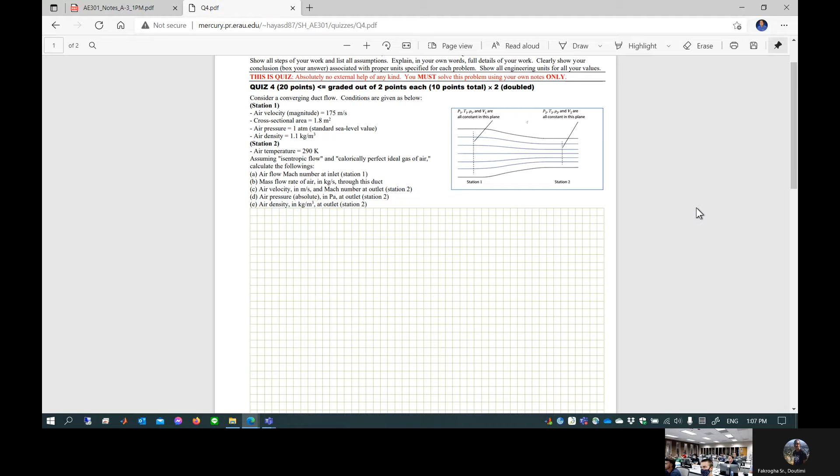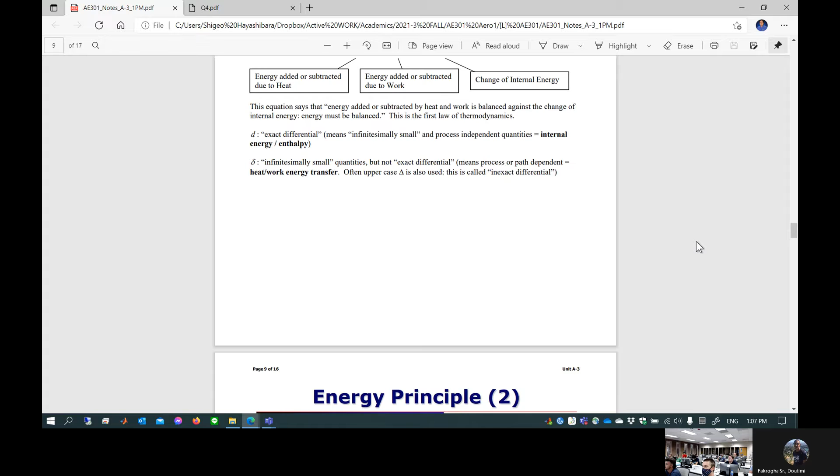So let's just move on. We are spending several class periods going over this unit A3, and then we finally gave up. Bernoulli's equation is not good, especially for high speed, because we are completely ignoring something which needs to come into play when we try to take a look at high speed. Because in high speed flow, obviously this thing happens all the time, okay, so this is an important thing.

Notice, if you look at the unit mass of air, that unit mass of air creates the volume, that's called specific volume of air. Specific volume of air is no longer constant in high speed. Compressibility comes in, that's what you call compressibility of high speed aerodynamics. Expansion, compression always happens; that is essentially energy transfer due to work. So you're going to introduce energy transfer due to work because the work is produced due to the high-speed flow field. That is going to change the energy level as it moves.

So how can we include that kind of thing? That's the main subject. Then we introduced the first law of thermodynamics. So we are going to go back once again. Sorry, I always have to change it up. Okay, so we are going to once again take a look at this equation.

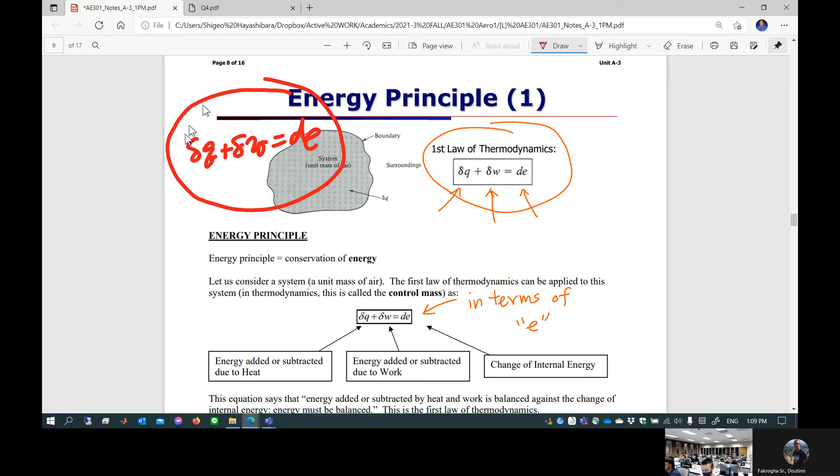Delta Q plus delta W equals dE, the first law of thermodynamics. This is always the starting point. First law simply says whatever the heat transfer is and whatever the work transfer is, combining those two gives the internal change of energy, internal energy per unit mass. This is the first law of thermodynamics, control mass form. We always go back there.

Important thing is happening: we discovered that in high speed flow, compression and expansion is essentially work energy transfer. It's happening because it's high speed. It just keeps going, so we are no longer ignoring that. Let's move on to that.

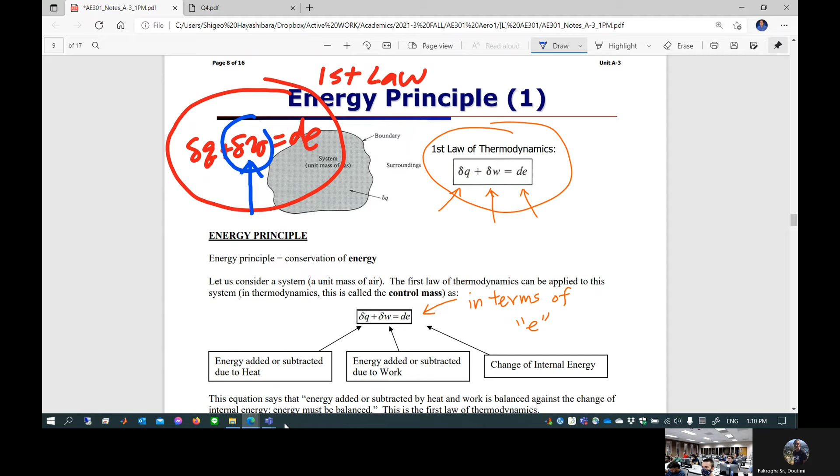We incorporated this moving boundary work into the first law of thermodynamics, and then we introduced two equations. This is still first law of thermodynamics, we just incorporated the work into the equation. Those two equations actually lead you to the definition of two different specific heats.

Specific heat under the constant pressure process, specific heat under constant volume process. Pressure and volume are always involved, so in order to determine specific heat, you have to assume one of them being constant. Otherwise, how can you figure out this component? We spent time incorporating specific heat under two different conditions: one condition volume constant, one condition pressure constant. If the volume is constant, you can relate amount of heat transfer with amount of internal energy. If it's under constant pressure process, you can relate amount of heat transfer with change of enthalpy. That's the specific heat we talked about, two different kinds.

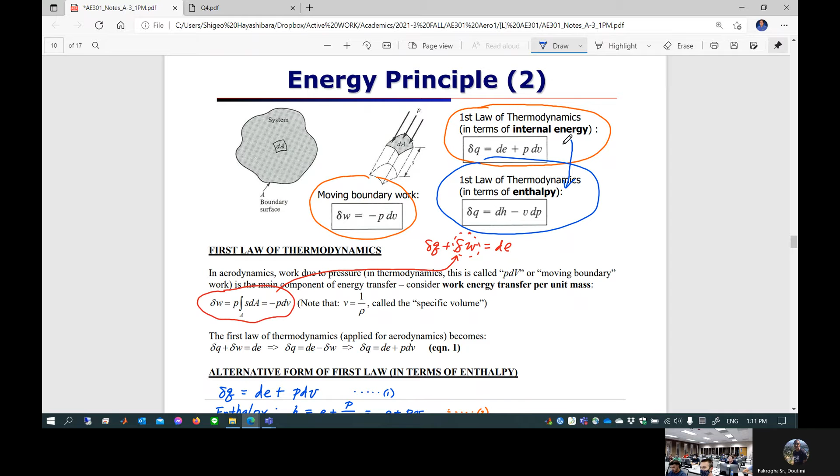As you remember from thermodynamics, we can model the specific heat either as completely constant, or still a variable but only depending on temperature. One is called calorically perfect ideal gas, one is called thermally perfect ideal gas. You can still model those as perfect gas, ideal gas, so you can relate pressure, temperature, density within the flow field because it's ideal gas. But one is much easier, one is more involved. Which one do you want to do, calorically perfect or thermally perfect?

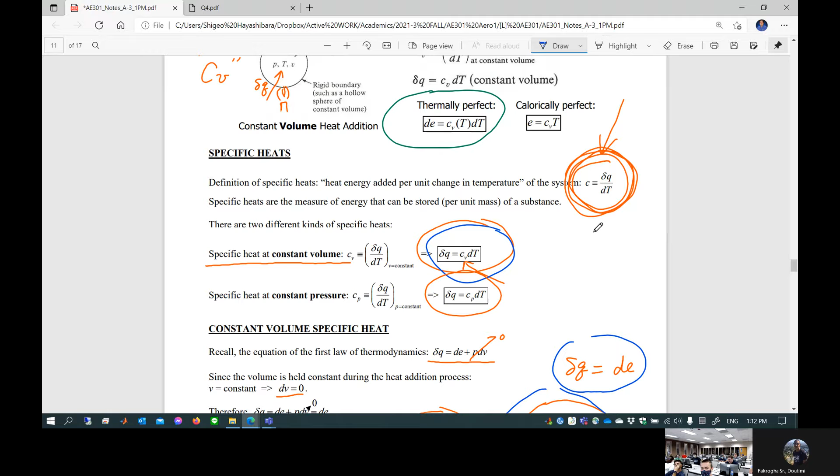Obviously, calorically perfect. I'm praying that the professor is not going to pick a thermally perfect problem for the next exam, because that would indicate the professor wants to flunk everybody. Oh, professor hates those students, he wants to flunk everybody. So let's just pick up the calorically perfect model -- it's so easy, I'm not going to do that, don't worry about it. You don't hate us? I don't hate you. I'm neutral, at least at this point. If you don't sleep in my lecture, I'm neutral, but it could tip toward negativity, I don't know, I'm not sure. Just joking, don't take it seriously everybody, I'm just trying to make you awake.

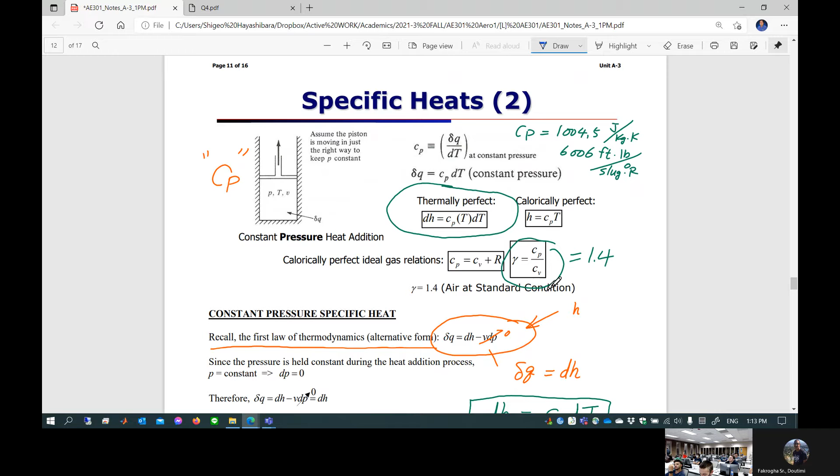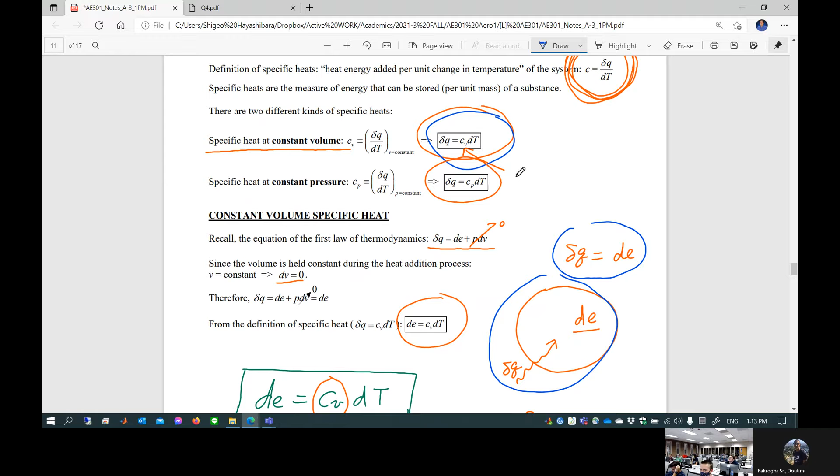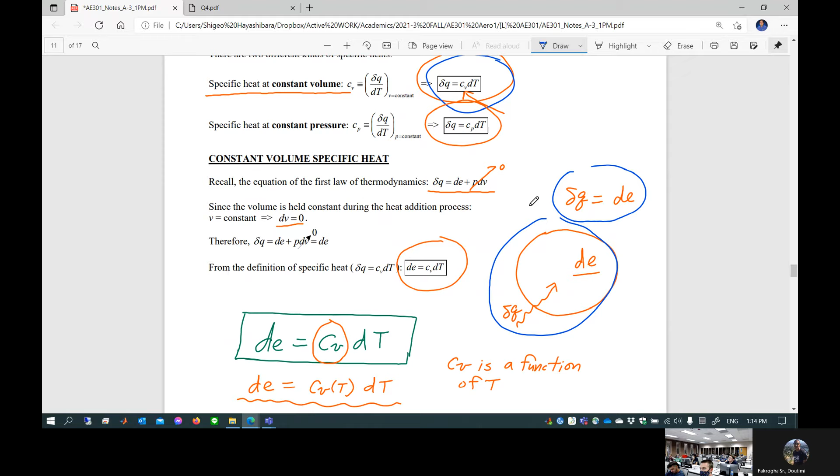So we came up with a few equations. If we assume calorically perfect ideal gas, having constant value of specific heat, either Cv or Cp, you can relate the temperature to internal energy or temperature to enthalpy itself. Using this knowledge, if you see a high-speed flow field where pressure and temperature are given, you can relate those things, knowing that specific heat value doesn't change. In other words, if you know the temperature, you know how much internal energy you have, and you also know how much enthalpy you have. That's the calorically perfect ideal gas model. So you now have knowledge relating temperature to energy, and enthalpy. Okay, so far we did that.

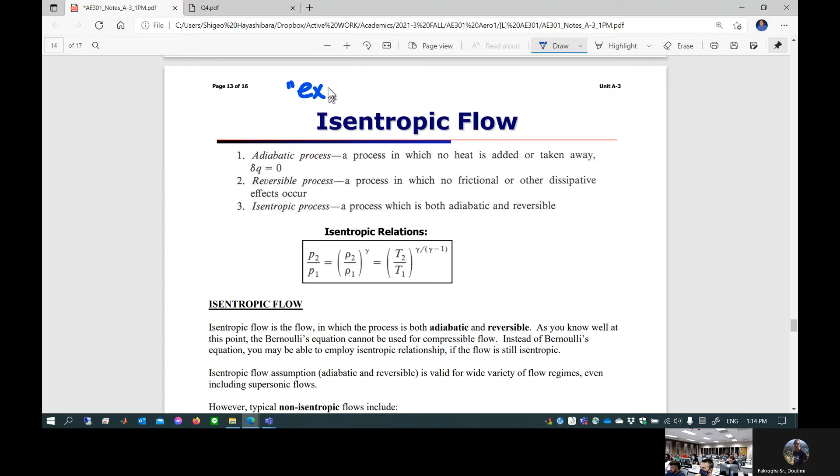Today, let's apply this in a practical sense to the high-speed flow field of aerodynamics. In this class, we are going to limit our applications to only external aerodynamics -- external aero, external flows. What is that? External means, well, this is an airplane, and you have a flow field going externally over that body. That's it.

Is it doing work? Because it's high speed, yes, if it's high speed. If it's low speed, no.

External flow is essentially flow over some kind of body, including airplane, automotive, and some other things. But we are not going to talk about something complicated, such as the flow field inside a jet engine -- that is not external flow. There are a lot more things going on: you have an inlet diffuser, you go through the compressor, the combustion chamber, the turbine, the exhaust nozzle, afterburner. That's not external.

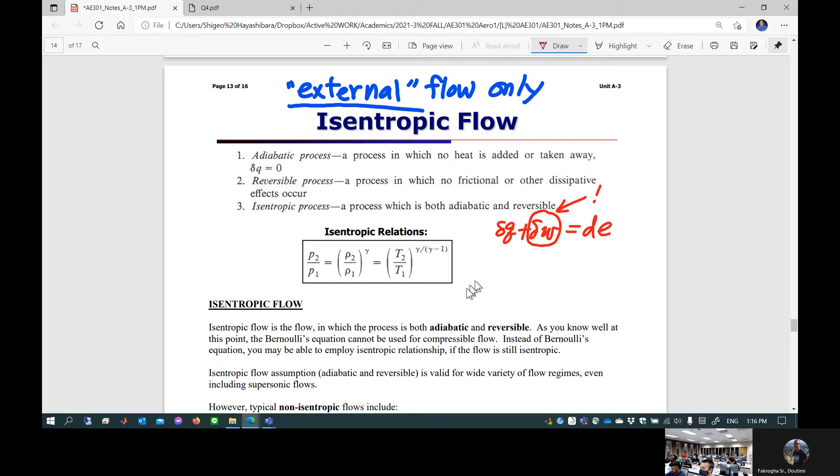Okay, so that's external flow. We want to make everything simple. If we look at application only for external flow, we can assume this way. Let's go back to the first law of thermodynamics, the equation we started with. First law of thermodynamics says delta Q plus delta W is equal to dE, right? Now, in high-speed aerodynamics, this is always happening, we cannot ignore it. However, if we're talking about external flow only, oftentimes we can ignore this term. You know what I'm talking about?

This is not a combustion chamber. You are not adding any heat energy. Flow is incoming, flowing over it, flows away. That's external flow, so we can assume this is adiabatic. You are not purposely adding or taking energy through heat. That's called external flow, okay?

So if this delta Q is 0, what do you call this process in thermodynamics? No heat transfer, adiabatic. So we're going to limit to adiabatic process only because it's external aerodynamics. Do not assume this equation can be applied casually for any high-speed flow field. If you're talking about a rocket nozzle, this is not adiabatic. If you're talking about a jet engine, this is not adiabatic. And even in an external flow field, if you create a shock wave and the flow goes across it, it's probably adiabatic, but it's not reversible.

Reversible. What is reversible? Anybody please tell me, go ahead. You can do the same process forward and backwards. That's right, in other words, you can completely reverse the process. You can retain the same amount of energy.

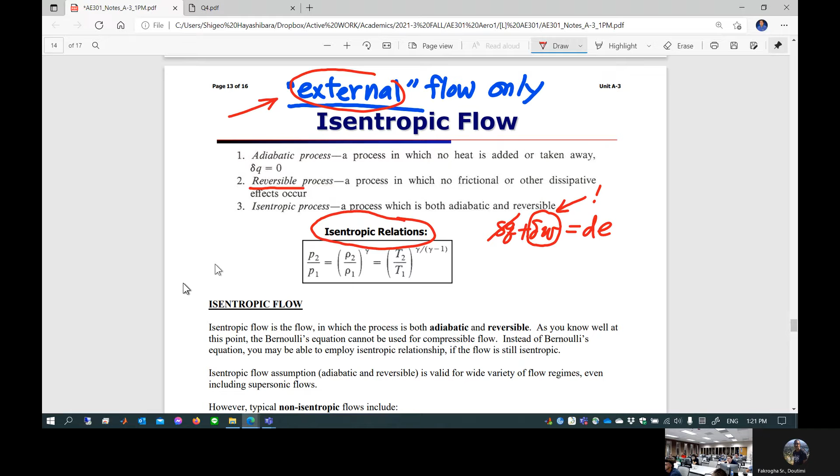Isentropic means adiabatic and reversible process. So even though this flow field is supersonic, it's still close to isentropic. It is compressible, yes, it's high speed. Density changes, but do you actually lose energy? Not quite, unless you go across a shockwave or something like that. So be careful about that.

If the flow field is isentropic, you can do two things. Number one, you can apply isentropic relations, which relate pressure, temperature, and density. Again, isentropic flow is still ideal gas, so you can relate pressure, temperature, density. But it's not the relationship P equals rho R T. Too bad, okay? You can still use this relationship.

Well, P equals rho R T anyways, but for two different locations, if you know density here, you can get the density there using isentropic relations, because you can assume this is isentropic flow. These two places still have to be on the same streamline. That's right, correct. We still stick with Euler's. So that's the next page.

The second thing you can do is apply the first law of thermodynamics, simplified version. What is the simplified version? This is it: delta W equals dE. Whatever work-energy transfer occurs because of compression or expansion is going to be 100% converted into internal energy change, so the temperature change, if you measure such a thing, you can determine the compressibility. If you have a compressibility, you have a change of temperature between two locations, even though you are not heating up or anything. Does it make sense?

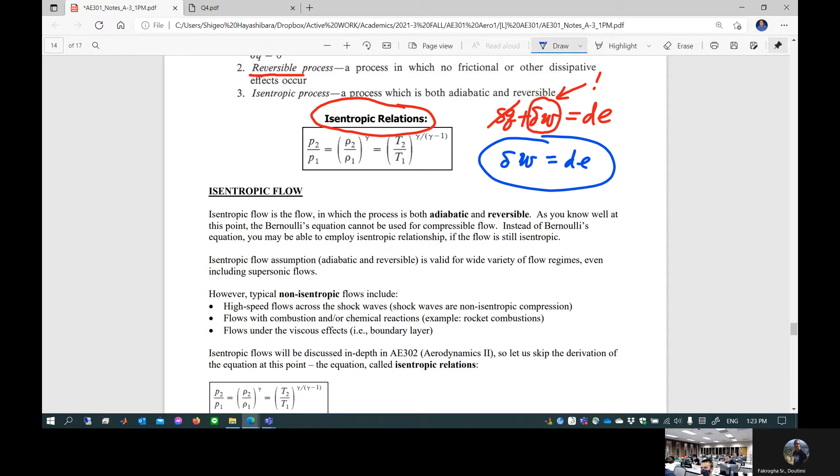Okay, so let's move on. Now we are going to derive the energy equation here. All right, so energy equation. Let me just catch up my cheat sheet. Energy equation, okay, here we go. So energy equation here.

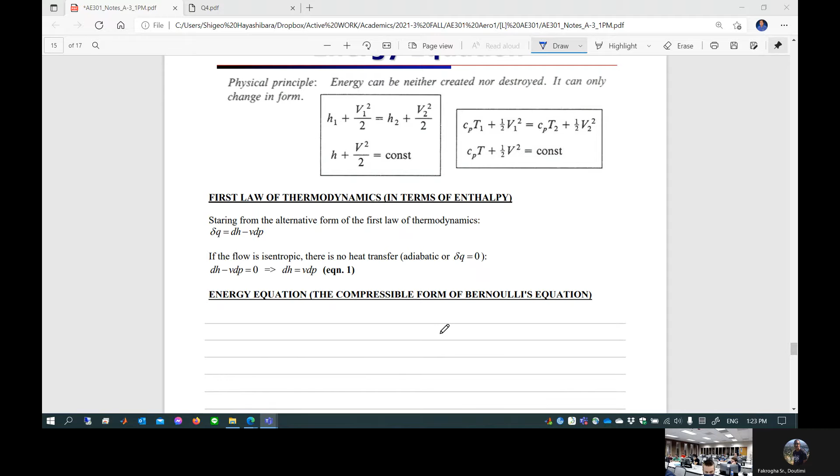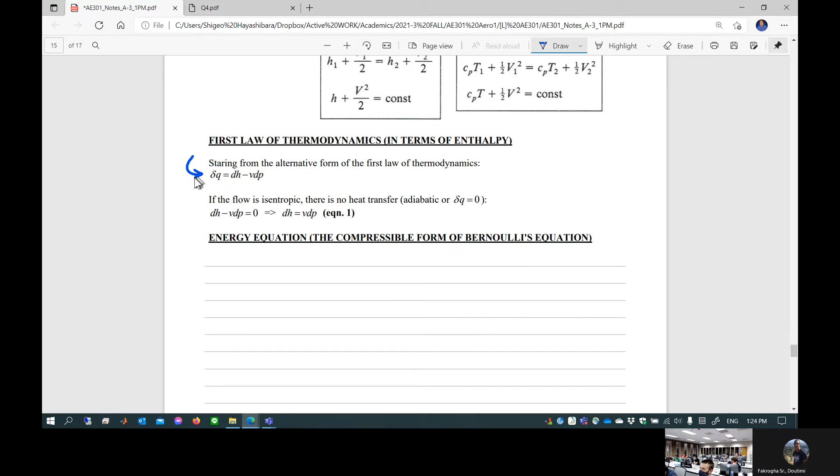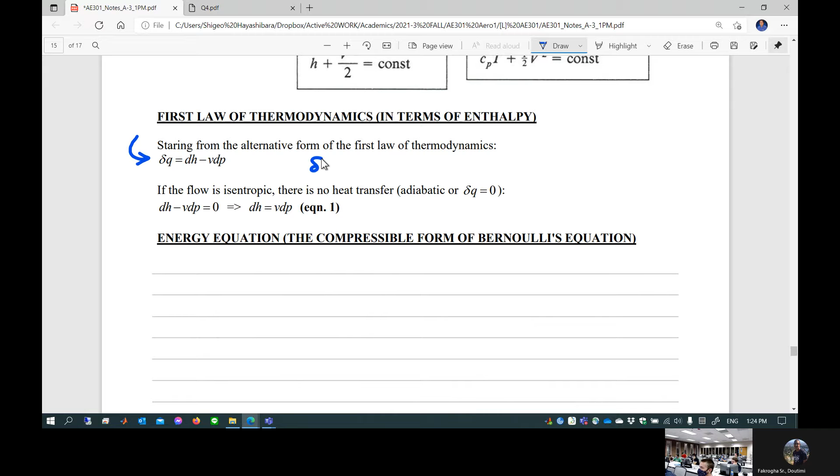Starting point is the first law of thermodynamics. Let's just take a look at it. I'm going to pick up the first law of thermodynamics in terms of enthalpy. Do you remember this equation? This equation relates the heat energy transfer to the change of enthalpy and V dP. Now, if this is adiabatic, delta Q is 0, because one of the conditions for isentropic flow is adiabatic. This equation now becomes this.

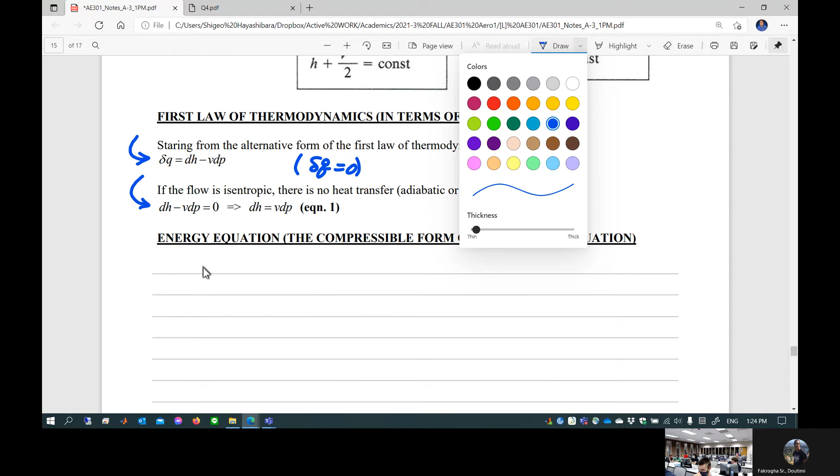So now I pick up equation 1: dH equals V dP. This is equation 1, nothing but the first law of thermodynamics. We can use the first law because this is isentropic flow. The first law still holds. We purposefully ignore the second law of thermodynamics, assuming this is a reversible process. Energy level doesn't change between two locations; energy stays constant. Anyways, we want to combine this with something else.

Guess what we want to combine this with? Remember, when we got Bernoulli's equation, where did we begin? Conservation of linear momentum, Euler's equation, here we go. Bernoulli's equation comes from Euler's equation with the condition density constant. Let's just go back to Euler's once again. What is Euler's equation?

As we know, Euler's equation is dP equals minus rho V dV. Do you remember this Euler's equation? This is along a given streamline. Do you remember that? This is Euler's equation. If you pick up this Euler's equation and assume density is constant along the given streamline, you get Bernoulli. But now we know we cannot assume such a thing. This is high speed, okay? So density might be a different value.

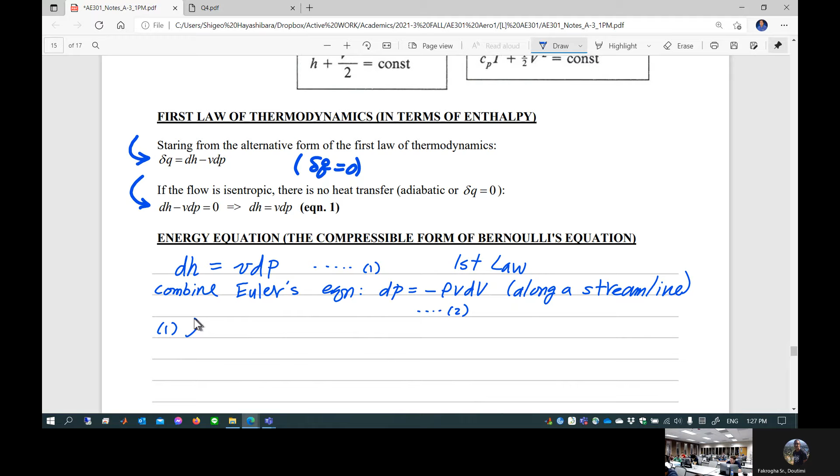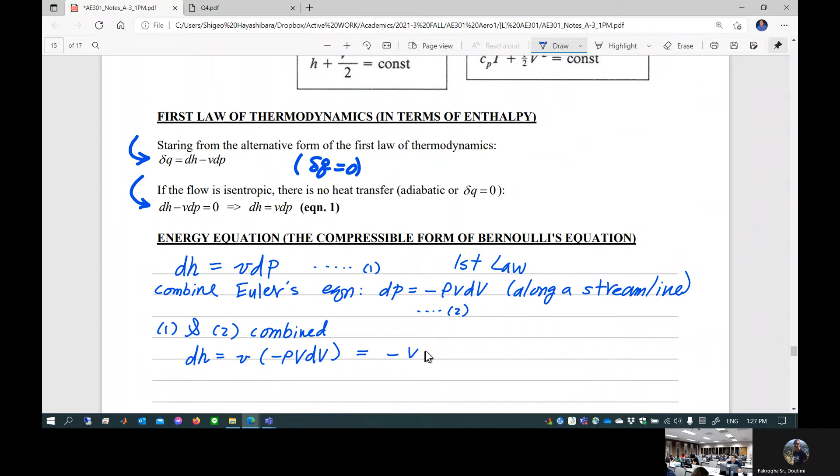So this is equation 2. Let's combine equations 1 and 2. So it's going to be 1 and 2 combined, let's just see it, okay? You're going to plug dP back into here. So dH equals lowercase v times dP, which is minus rho v dV. Those are velocities, this is specific volume, inverse of density. What do you have here? Minus v dV, right? Oh, okay. Can we integrate this? Oh yes, let's integrate.

So you are going to pick up the streamline. This is location 1, location 2. Along this given streamline, you can integrate this equation: integral between location 1, h1, h2, dh is equal to negative integral V1 to V2, V dV.

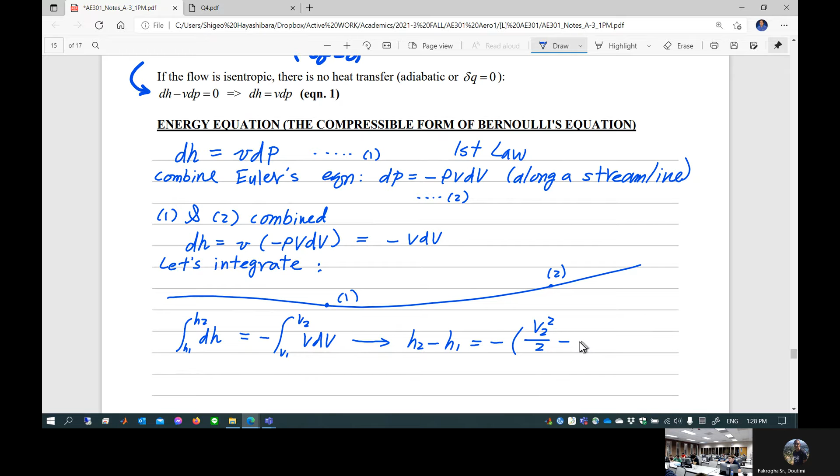This actually gives you the change of enthalpy between location 1 and 2. h2 minus h1 is equal to negative V2 squared over 2 minus V1 squared over 2. This gives you the relationship between 1 and 2: H1 plus V1 squared over 2 is equal to H2 plus V2 squared over 2. Simplified, H plus 1/2 V squared is equal to constant.

Oh, I got the algebraic equation. Kind of looks like Bernoulli. This is called the energy equation, in algebraic form. So suppose if I have a value of h and a value of velocity, you can plug in and get the value out. And then if this is an ideal gas, calorically perfect,

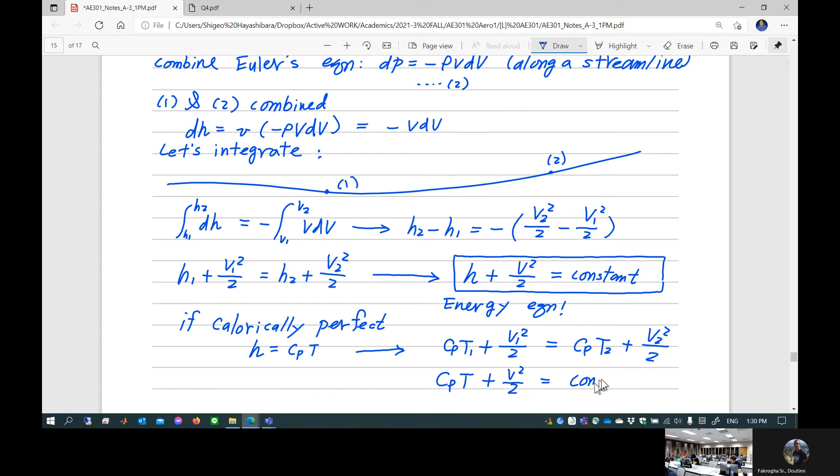you can say H is equal to CpT. So you can say CpT1 plus V1 squared over 2 is equal to CpT2 plus V2 squared over 2. That simplifies to CpT plus V squared over 2 is constant. Of course, this constant is along a given streamline.

Go ahead, Michael. Don't you mean thermally perfect? No, caloric— well, thermally perfect is dH equal to Cp as a function of temperature still. That's what I'm confused about. Thank you, yeah, this is thermally perfect, you don't want to deal with it. This is calorically perfect, it's algebraic.

So the energy equation, that's the specific energy, isn't it? Specific, because it's energy per unit mass. That's right, yeah, correct, you're right. Energy equation.

Oh, this is the equation I wanted to have. Now I can apply this equation for more than 0.3 Mach number because density can be a variable. However, what's the condition? Still, this is a steady flow, implicitly no body force because it's coming from Euler, and then it's coming from the first law of thermodynamics, so this must be isentropic. And also this is perfect gas, calorically perfect ideal gas. If so, you can use this equation instead of Bernoulli's for high speeds.

Okay, so next page, let's just apply it. Take a look at it. Go ahead, he says steady, no body force, that's Euler. Is it? That's Euler. You know Euler, do you? Yeah I know. So steady, no body force, that's the condition for Euler.

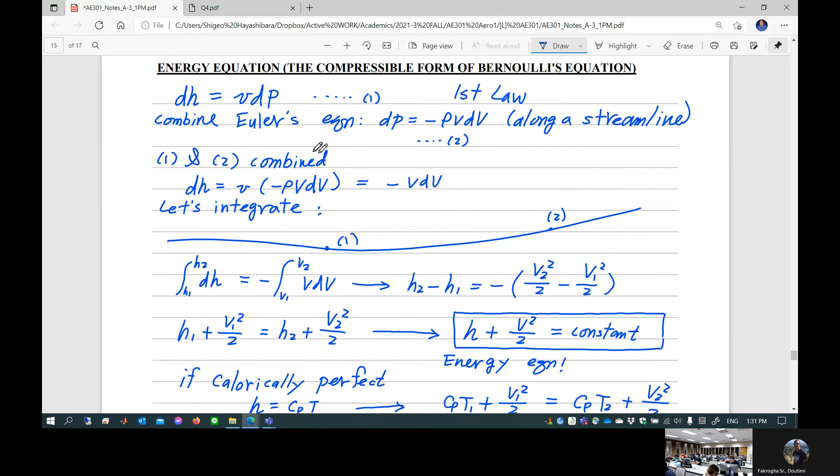Yeah, and then it's isentropic. Isentropic is coming from first law of thermodynamics. And then calorically perfect ideal gas is also added. So you need to know all of those conditions because those are limitations for this equation. So this equation still comes with limitations, but one of the limitations is gone: less than 0.3 Mach number. So you can apply this equation for more than 0.3 Mach number.

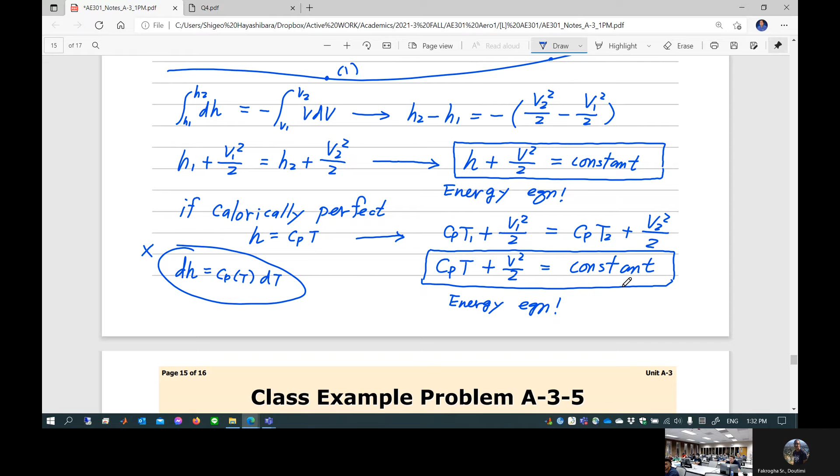Okay, so let's just take a look at next page. A high-speed business jet aircraft. At this moment, you kiss goodbye to Bernoulli, right? High-speed business jet aircraft, oh let's apply Bernoulli's equation—go ahead, do that, people laugh at you. Of course you don't do that. Okay, at this moment this is not less than 0.3 Mach number anymore.

So a high-speed business jet aircraft is flying at 10-kilometer altitude with 750 kilometers per hour. This is way more than 0.3 Mach number, of course. The temperature and pressure at a point on the wing is minus 45 degrees and 2.8 times 10 to the 4 Newton per meter squared, that's Pascal. What is the velocity at that point? And if this is an exam problem, I'm not going to give you this kind of hint. This hint will be gone if this is a final exam problem.

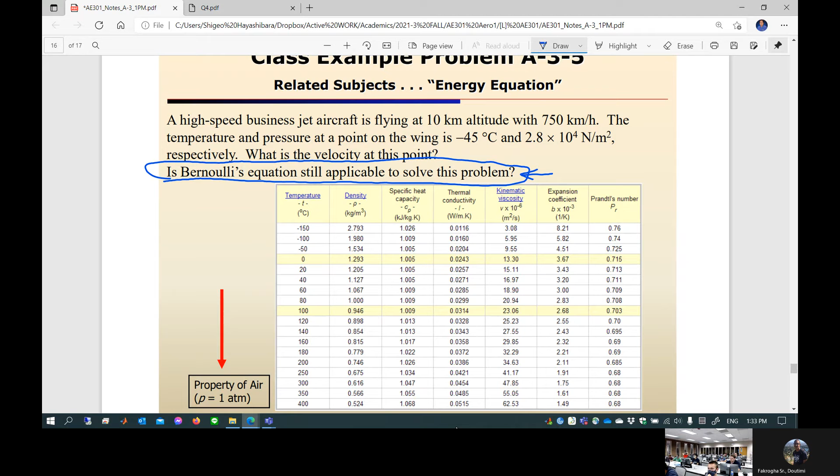If you casually pick up Bernoulli and apply it, you get zero. Of course. So be careful. This is a much nicer class example problem, not the final exam. So what do you do? Well, there's data given.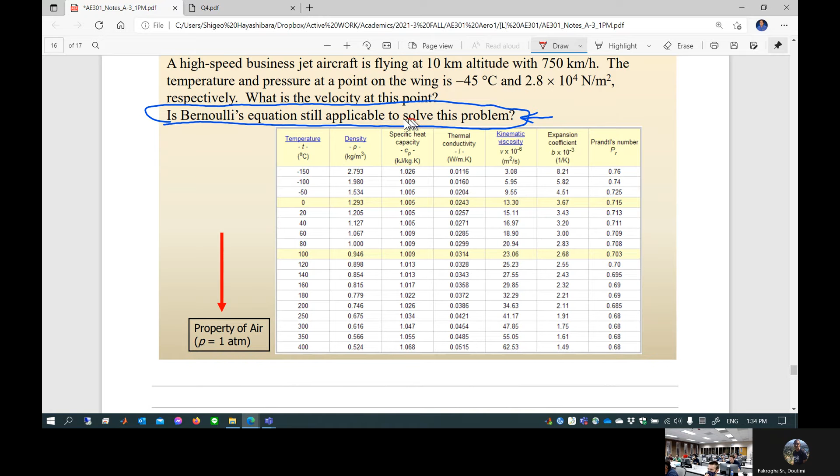Now I want to answer your question, Dan. You asked, how much can we assume calorically perfect? In other words, what is the temperature range and all that? Let's take a close look. We want to look at this property table, specific heat CP. Let's zoom in a little bit. This is specific heat. Obviously, this is just a pure function of temperature. It doesn't depend on pressure, only on temperature.

Now take a look at it. In the range of this temperature, the value is about 1.005 to 1.009. If I'm very strict, I can only choose this range of temperature, minus 50 to about 40 or 50-ish. This is 1.005 kilojoule, by the way, so this is 1005 joule per kilogram K, which doesn't change much in this range of temperature. This is called calorically perfect ideal gas model because it's constant in this room temperature range. However, if you go to higher temperature, it starts changing to a higher value. So this is still thermally perfect, but it's no longer constant.

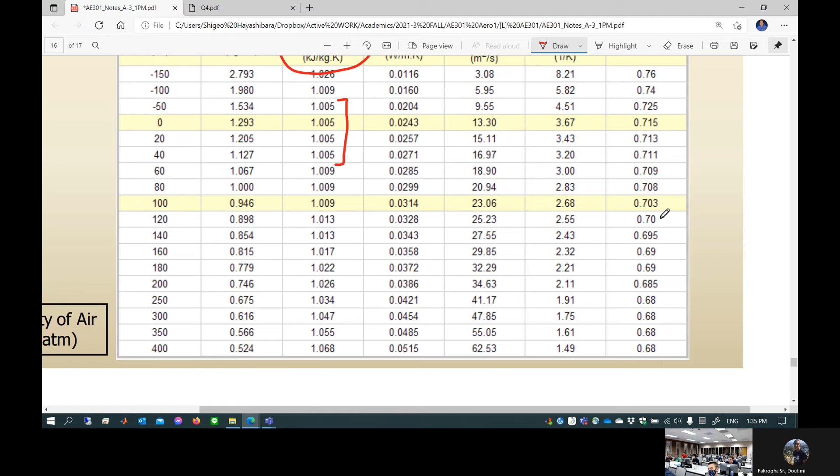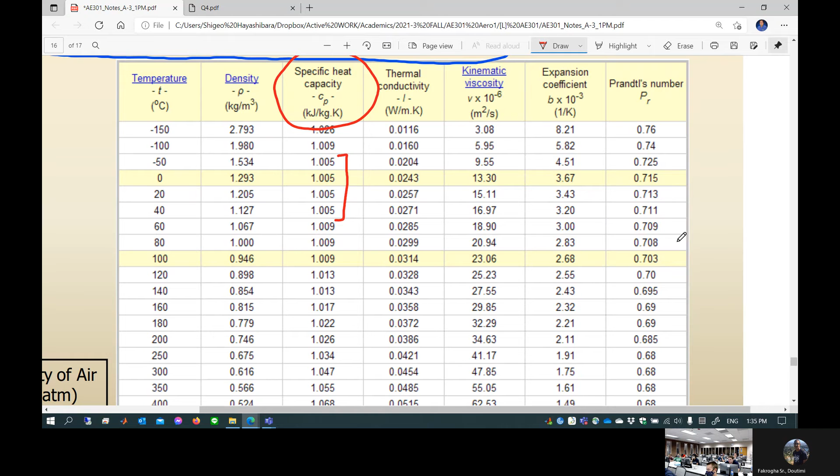That's the difference between calorically perfect and thermally perfect ideal gas model. So you have to switch back and forth. Obviously, if you keep using a constant value of CP in a higher temperature zone, you introduce errors. So how much error is tolerable? That's the question. So anyway, let's assume this temperature is minus 45. In this temperature range, let's assume this is calorically perfect, so let's pick up CP value of 1005.

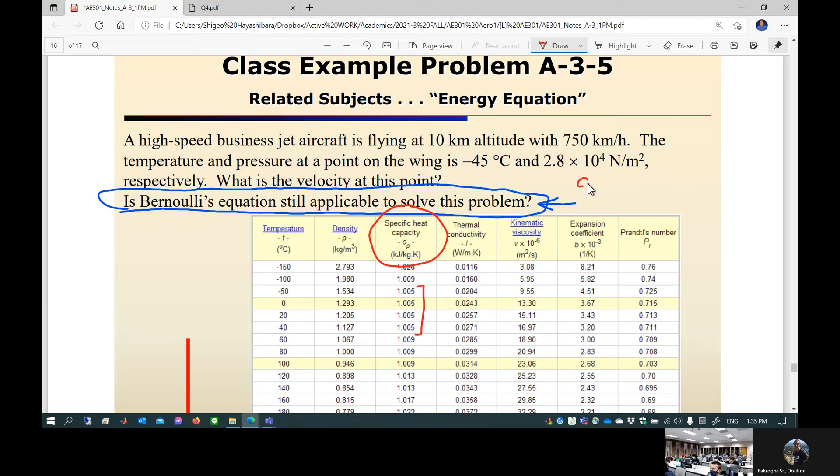Joshua: I was wondering, is this table we have here the standard values, or is there another table we'll refer to as standard values? Great question. This property of air is coming from standard sea level pressure. Now, isn't this 10 kilometer altitude? Can we still use the standard sea level value? Yes, in terms of CP, because CP doesn't depend on pressure, only temperature. Like I said, CP is a function of temperature only, not pressure. That's a great question, actually. That's why we can still use this in terms of specific heat values.

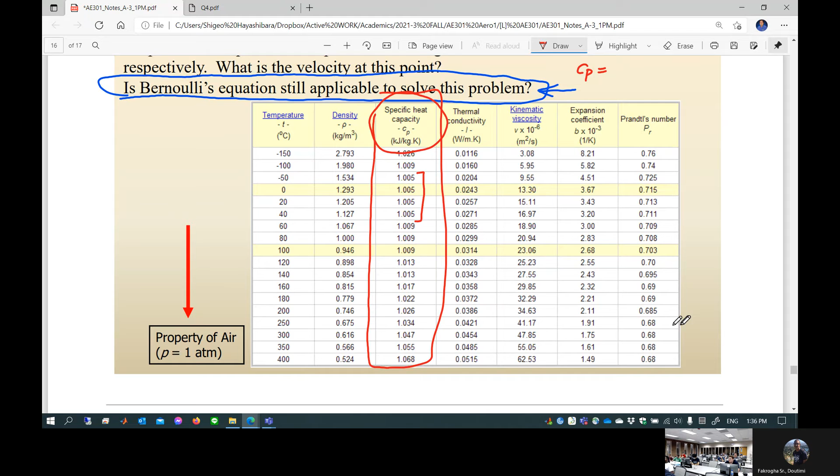If you start picking up other things, you have to go to the 10 kilometer altitude values. But specific heat doesn't depend on pressure, only on temperature. So you can still use at least this data set. All right, so first of all, what is the first step to solve this problem? This is 10 kilometer altitude. So, what is the speed of sound? 299.5 meters a second at 10 kilometers.

Speed of sound, you have to compute gamma R T. So you have to pick up the standard value of temperature at 10 kilometers, looking up your property table, and just plug it in. Speed of sound is actually 299.5 meter per second. Speed of sound is a function of temperature, so you have to pick up the 10 kilometer standard value of temperature to determine the speed of sound. That's the first step.

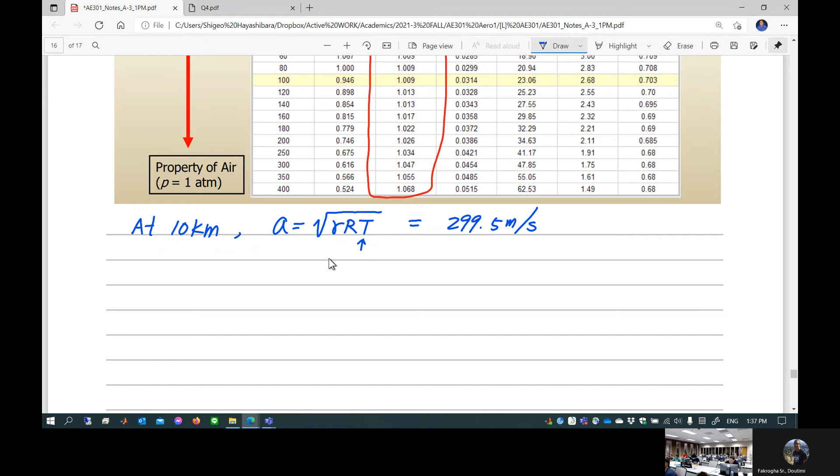Does density have any play in this? Density has nothing to do with speed of sound. Actually, it has something to do with it, but at least we can use this equation. We'll find out more details about the speed of sound equation later, but for a moment, let's just ignore the density effect. You only worry about temperature when you figure out speed of sound at this moment.

Mach number is, of course, velocity over a, speed of sound. So you're given 700 kilometers per hour, 750 kilometers per hour. Let's convert it to meters per second: 1,000 meters over 1 kilometer, and 1 hour is 3,600 seconds. Divided by 299.5 meter per second, if you compute this conversion process, you actually get 208.333 meter per second. So 208.333 divided by 299.5 will get you the Mach number.

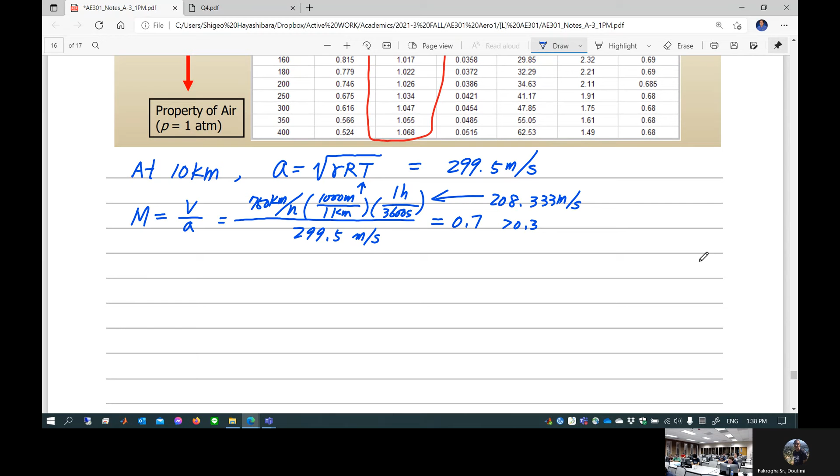0.7. Whoa, you go like whoa, this is more than 0.3. I'm doomed because the only equation I know is Bernoulli. So no, I cannot use Bernoulli. So what? Apply the calorically perfect... the energy equation.

So let's say this is an airplane flying at high speed. Roughly speaking, this is the airplane, and you're going to probably assume this kind of streamline is involved. Let's say this is location 1, and this is location 2. Location 2 is what you're interested in, because location 1 is a free stream, infinity. Now at this point, do we know the temperature T infinity? T infinity is the standard 10 kilometer temperature. You can look it up: 223.3 Kelvin, which is T1.

What is CP? And this is V infinity. V infinity is how fast you're flying. This is a free stream, right? You found out this is 208.333 meter per second, right? This is V1 right here, the free stream. This is actually, in practical sense, how fast your airplane is moving with non-moving air. Remember that earlier we switched the frame using Galilean transform. Airplane is not moving, but the air is moving.

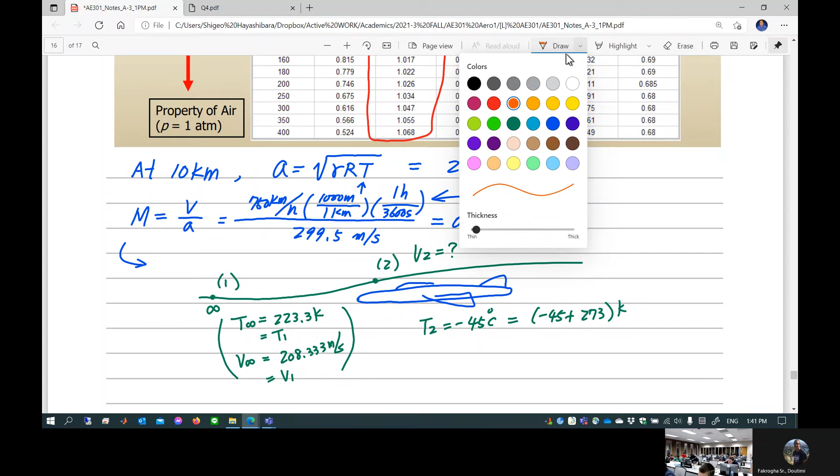Do we know the temperature? Can we get temperature information from there? Yes. Temperature is given, minus 45. T2 is minus 45, temperature information is given. So this is going to be in Kelvin: minus 45 plus 273 Kelvin. That's the temperature right here. So out of this information, temperature, can I get velocity V2?

Any idea what equation you want to pick and use? Energy equation, that's right. Let's just pick up the energy equation. So energy equation basically says, let's assume calorically perfect ideal gas, because the temperature range allows it.

Calorically perfect ideal gas says Cp T1 plus V1 squared over 2 is equal to Cp T2 plus V2 squared over 2. So from here, V2 is equal to square root of V1 squared plus 2 times Cp times T1 minus T2. Let's just plug in. V1 is 208.333 meter per second squared, plus 2 times Cp value. You're gonna pick it up from the table given.

What does that say? 1005, isn't it? 1005 joule per kilogram Kelvin. And temperature is T1, 223.3 Kelvin, subtract T2, which is minus 45 plus 273 Kelvin. Now if you compute this through, you're gonna get V2, which is 184.27 meter per second. You have to double check by using the temperature value given, T2. Temperature T2 will give you the speed of sound A2.

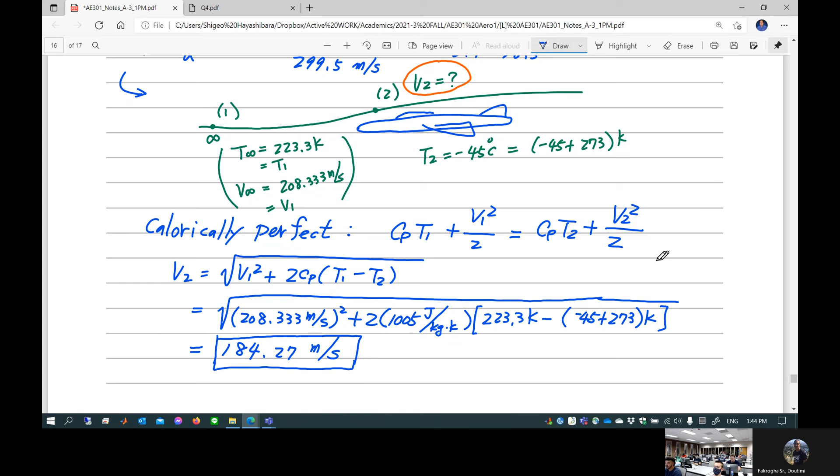If we do have a problem that either starts above 0.3 and then goes below, or starts below and then goes above, how should we approach it? You have to double check both cases. In other words, the only case where you can still use Bernoulli is when both are less than 0.3. That's the only case you can use Bernoulli. But if we were given a problem where we double check the speeds before and after, is there a different equation we use for going between? No.

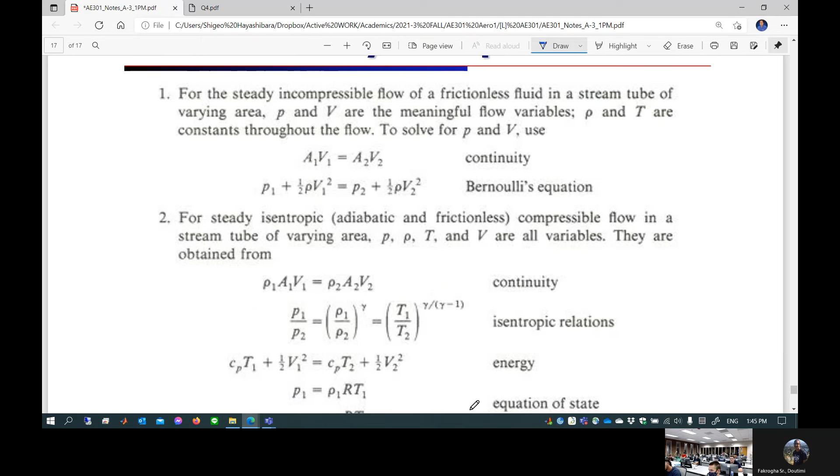So you can't do anything if you're going between? Let me answer that question in a little more depth. Do you have any more questions? Let's not ask those kind of specifics. Let's just go back to a little more detailed conceptual idea of why this is working and why not the other one.

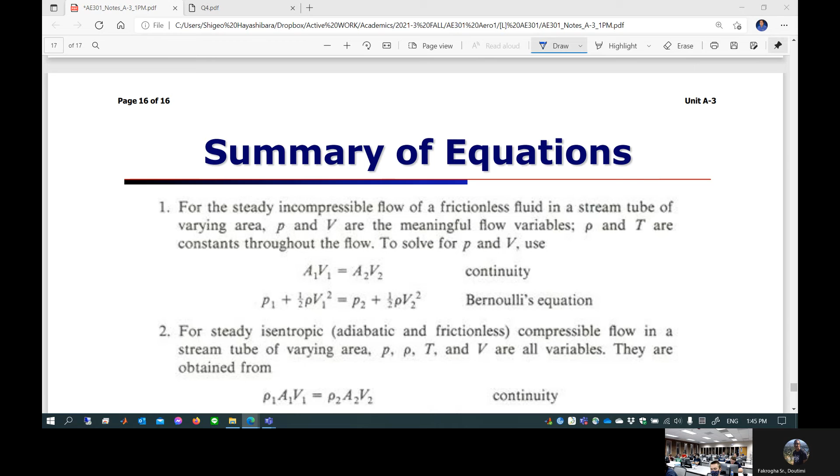I was just going to make a comment that one way we can tell that the Mach number we're ending up with is always going to be above 0.3 is the fact that we have our initial velocity of 208 squared in the square root. So it's always going to be at least greater than that.

So basically, you have a variety of cases. Some start with less than 0.3 Mach number at the free stream. However, because you create a very sharp acceleration surface, that may exceed 0.3 at certain locations. If that happens, how can you analyze it? Of course, the only tool you can use is energy balance. You know why? Because typically in a low speed wind tunnel...

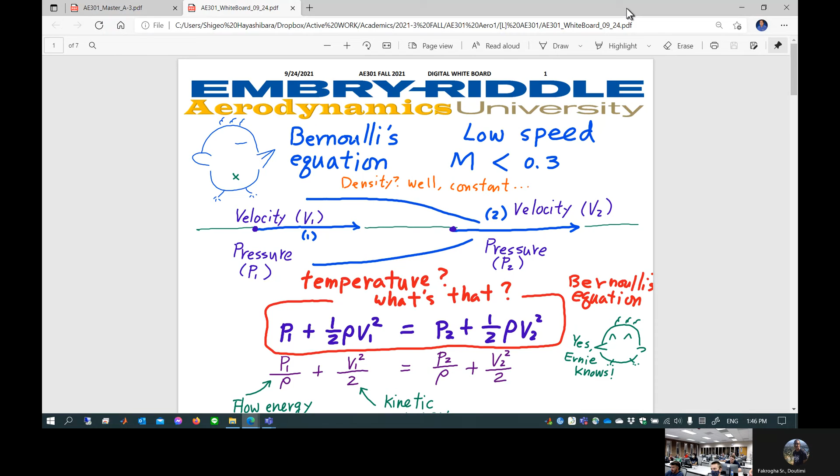I don't want to do this today in 5 minutes because this is so important. I don't want to miss this, so let's come back on Monday and take a look at the details of what the energy balance is trying to say. I want to revisit this on Monday because I haven't finished the last page. Sorry about that, so this is the last page.

So you guys have a question based on the motivation that, hey, I know I have to do quiz 4. So Professor, I want you to answer my question: if quiz 4 is the case that one end is less than 0.3 and the other end is more than 0.3, what is the right option, Bernoulli or energy? It's energy, yeah. But here's the important thing: why?

And then why do people actually use Bernoulli in a low speed wind tunnel? If the energy equation is better than Bernoulli, why don't you pick energy all the time and avoid the complication of having to check Mach number? That is my question to you. Do you have an answer for that?

Go ahead. I believe it's due to compressibility. Yes, it is compressibility, but that's not the answer for why. Right? Is it because you can get more details from Bernoulli's equation, such as pressure and static information, more details at those speeds? Yeah, you're kind of close.

Go ahead. You can measure your free stream temperature, but it's hard to measure your T2 temperature, like if you're testing on a wing or something. So that means, how much accurate information is available in low speed versus high speed? In other words, in a low speed wind tunnel, do you think you can measure a very accurate temperature change from one location to another? There's no way you can do such a thing because the change is so insignificant.